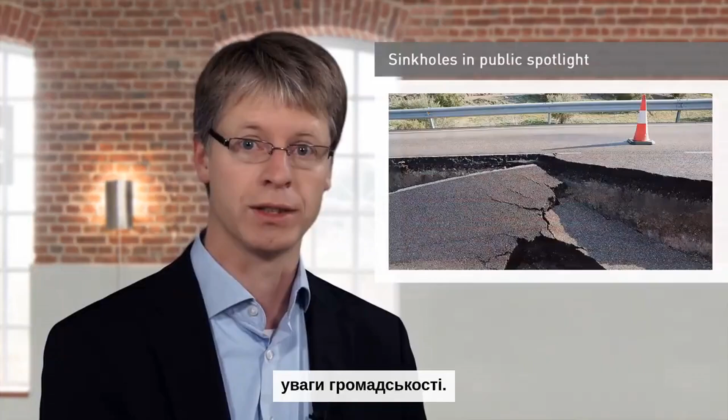In the following, I'd like to provide you with some information about the topic of sinkhole bridging using geosynthetic reinforcements. The existence of sinkholes and their importance in infrastructure engineering are matters that generally receive little public attention. This situation reverses, however, if traffic routes are affected, compromising public safety and impairing traffic, if not stopping it altogether.

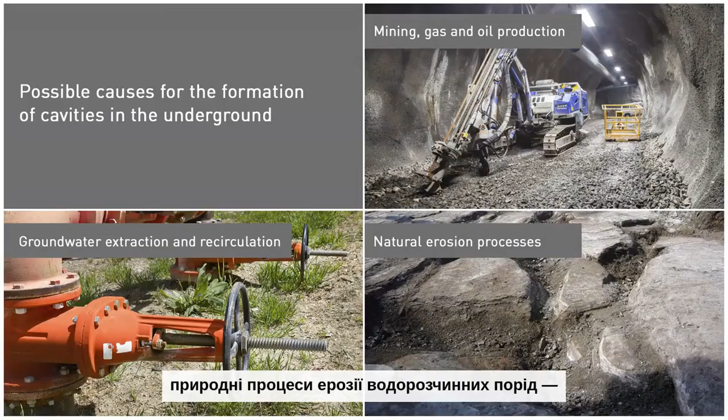There are various causes for the appearance of underground cavities. On the one hand, they can be caused by human activities, such as mining, gas and oil extraction, or groundwater extraction and recirculation. On the other hand, natural erosion processes through water-soluble rock containing chalk, gypsum or salt can also be responsible.

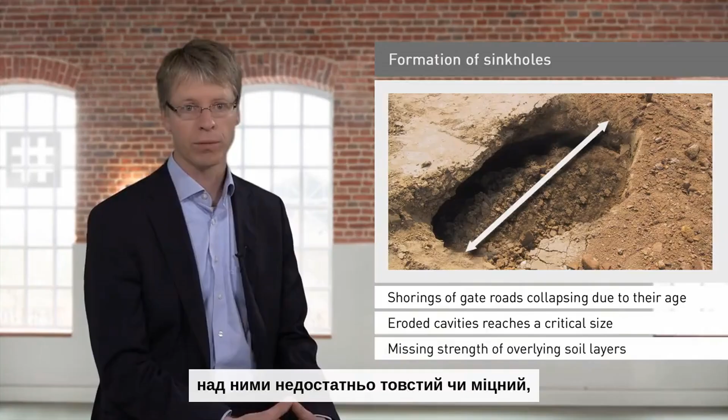Depressions or sinkholes on the surface then appear when, for example, the support systems of abandoned shafts fail due to old age, or eroded natural cavities reach a critical size and the overlying layers of soil are not thick enough or strong enough to bridge them. The appearance of sinkholes is often associated with a change in the groundwater and surface water balance.

There are many possible approaches to stabilizing and bridging sinkholes, ranging from safely isolating sinkholes by injecting them with various fillers or erecting extensive reinforced concrete structures. In addition, safeguards can be installed to secure regular traffic permanently, such that no deformations are allowed on the surface during the entire period of use, or alternatively, only for a short length of time, long enough to interrupt traffic in an orderly way so that repair measures can be introduced.

The method of reducing the impact of sinkholes using geosynthetic reinforcement is quite simple to explain by an analogy with a clothesline. After excavating a 2 to 2.5 meter thick soil layer, the reinforcement is laid in 1 or 2 perpendicularly arranged positions over the hazard area and anchored outside this area. In the clothesline example, these are the hooks in the wall.

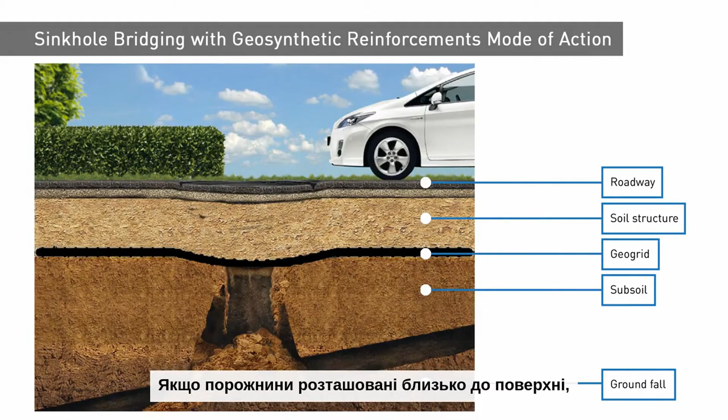Should the cavities be located close to the terrain surface and neighbouring buildings permit it, it is sensible to perform a deep compaction before placing the reinforcement. The latter process is referred to as dynamic compaction. If a new embankment is to be constructed, soil excavation is of course unnecessary.

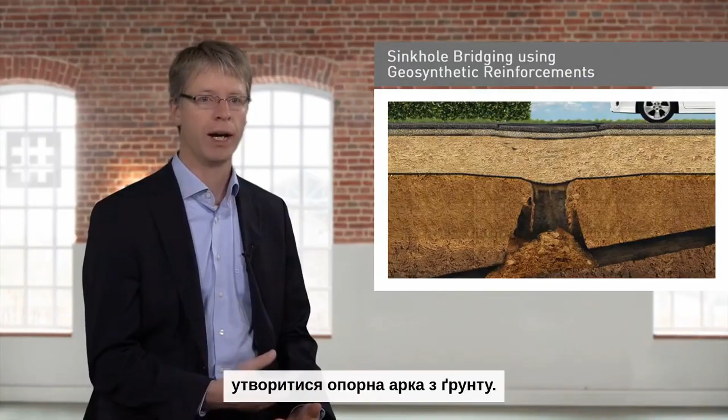If a sinkhole event occurs, the soil loads transfer to the reinforcement, which sags as a result, preventing the soil from completely collapsing. Only with small sinkholes and relatively large covering depths can a supporting arch form in the soil above the reinforcement, but as a rule, the soil hangs completely on the reinforcement.

The higher the axial rigidity of the reinforcement, or of the clothesline, the less it sags. As an extreme example, imagine that your clothesline were a steel cable and your neighbour's a rubber band. In addition to strength properties, the creep characteristics of the clothesline reinforcement are very important. If a reinforcement tends to creep, its sag would increase under a load.

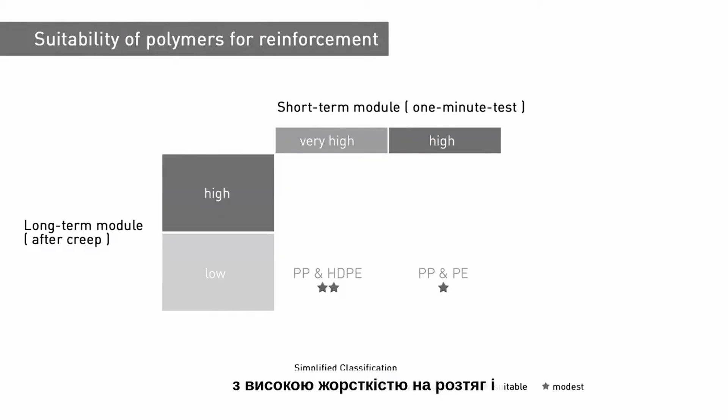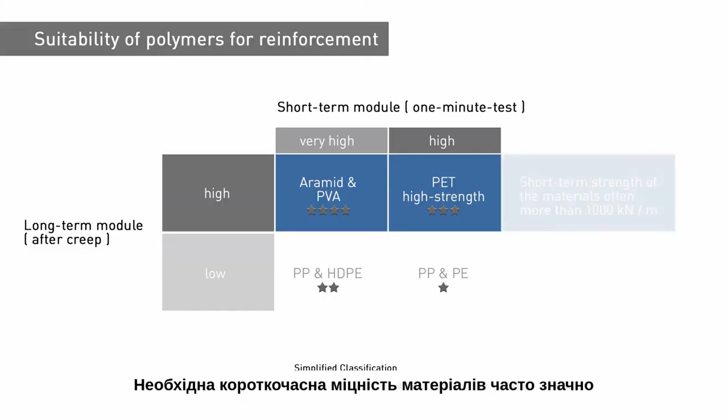For this reason, only geosynthetics manufactured from high-quality raw materials with high tensile stiffness and low creep qualities can be used to bridge sinkholes. Aramid and polyvinyl alcohol are the standard materials for this application. Polyester reinforcements are suitable for bridging cavities in small diameters. The required short-term strength of the materials can often be well in excess of 1,000 kilonewtons per metre. That makes 100 tonnes on a 1 metre strip.

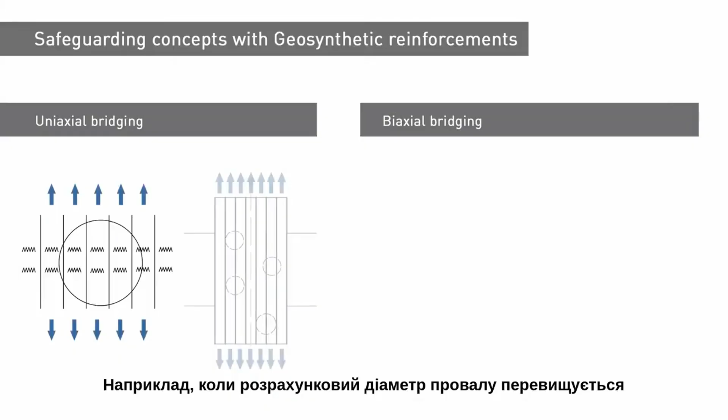Geosynthetics are ductile building materials, especially in exceptional calculation situations, for example when the calculated diameter of a sinkhole is exceeded, a value which is itself difficult to predict. Securing methods using geosynthetic reinforcements provide a high level of safety. In comparison to steel or reinforced concrete, which are more brittle materials, geosynthetic reinforcements have considerable load capacity despite increasing deformation. In such extreme cases, a design's fitness for use can of course no longer be guaranteed. However, a catastrophic collapse can be prevented under certain circumstances.

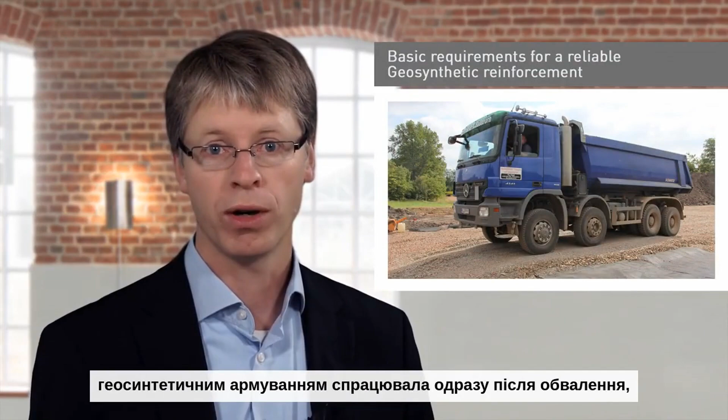In contrast, steel or reinforced concrete structures would fail very suddenly without any recognizable advance notice if the load capacity is exceeded. In order that the sinkhole securing system with geosynthetic reinforcement is activated immediately after the sinkhole collapse occurs, high-quality construction and competent construction supervision are indispensable. This is the only way to ensure that the reinforcement is laid without folds and is anchored properly.

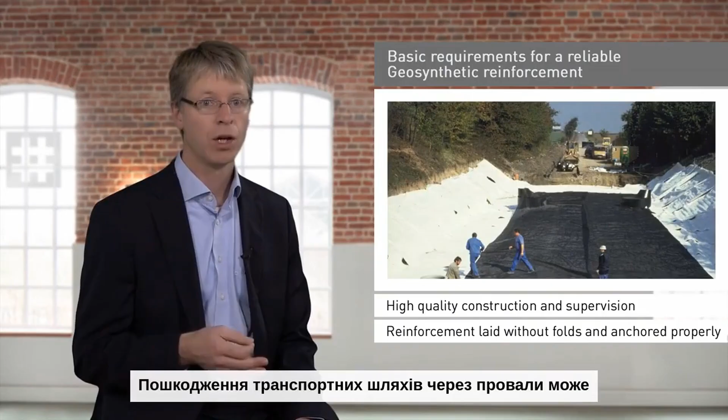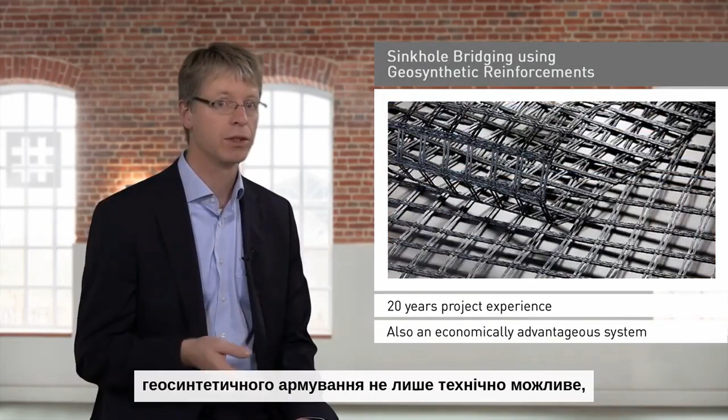Damage to traffic routes caused by sinkholes can result in huge impediments in private and public places and traffic restrictions for extended periods of time. Project experience made over the last 20 years has shown that bridging cavities with the help of geosynthetic reinforcement is not only technically feasible, but also economically advantageous when compared with alternatives, even for railway tracks.